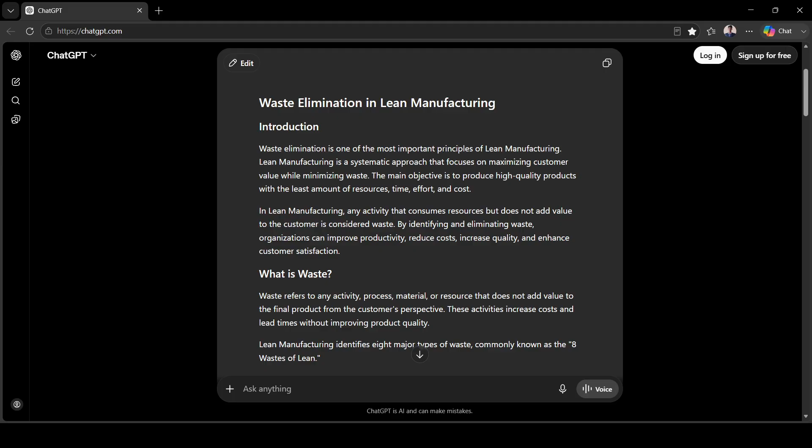Then what is waste? Waste refers to any activity, process, materials, or resources that does not add value to the final product from the customer perspective. This activity increases cost and lead times without improving product quality.

In lean manufacturing, there are 8 major types of waste, commonly known as the 8 wastes of lean. I think before you heard about 7 wastes, and now 8. The 7 wastes are transportation, inventory, motion, waiting, overproduction, overprocessing, and defects. And now the 8th one added is unused skill.

Let's start with the first one: transportation. Transportation waste occurs when material, product, or information is moved unnecessarily from one location to another. Example: excessive movement of raw materials between departments, unnecessary transportation of product within the factory. Effects: increased handling cost, higher risk of product damage, longer production time.

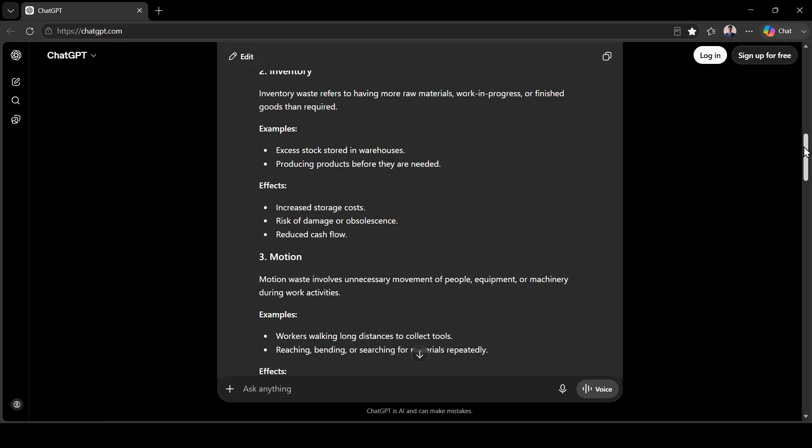The second one is inventory waste. Inventory waste refers to having more raw materials, work in progress, or finished goods than required. Example: excess stock stored in warehouses, producing products before they are needed. Effects: increased storage cost, risk of damage or obsolescence, reduced cash flow.

The third one is motion. Motion waste involves unnecessary movement of people, equipment, or machinery during work activities. Example: workers walking long distances to collect tools, reaching, bending, or searching for materials repeatedly. Effects: worker fatigue, reduced productivity, increased risk of injury.

The fourth one is waiting. Waiting waste occurs when workers, machines, or materials are idle due to delays in the production process. Example: waiting for materials to arrive, machine downtime due to maintenance issues, delay in approval or inspection. Effects: increased lead time, lower productivity, missed delivery schedules.

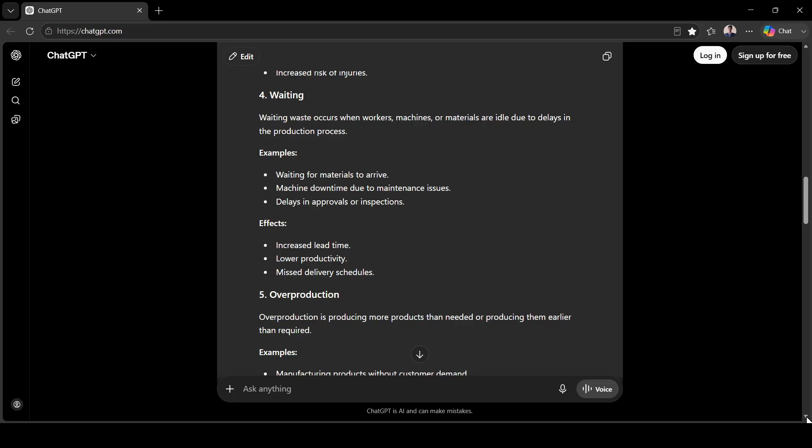The fifth one is overproduction. Overproduction is producing more product than needed or producing it earlier than required. Example: manufacturing products without customer demand, producing large batches unnecessarily. Effects: excess inventory, high storage cost, increased risk of obsolete products.

The sixth one is over-processing. Over-processing occurs when more work is performed on a product than what the customer requires. Example: unnecessary inspection, using expensive processes where a simpler method would be sufficient. Effects: increased production cost, longer processing time, wasted resources.

The seventh one is defects. Defect waste includes errors, repairs, and scrap resulting from poor quality. Example: manufacturing defective products, reworking products due to quality issues. Effects: increased cost, customer dissatisfaction, loss of reputation.

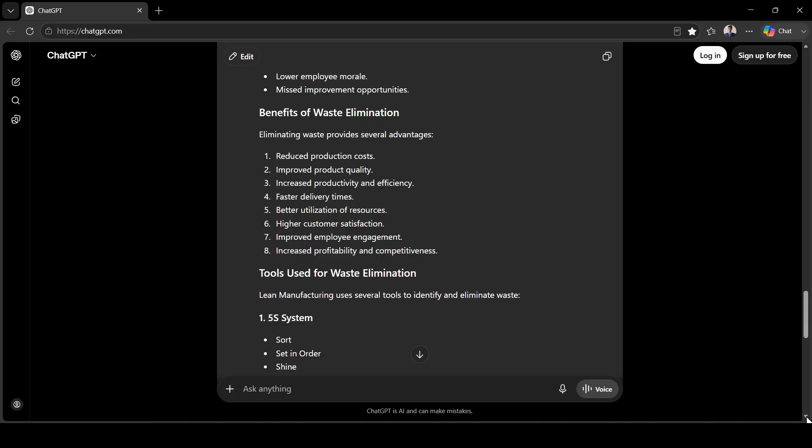Tools used for waste elimination. Lean manufacturing uses several tools to identify and eliminate waste. The first one is the 5S system: sort, set in order, shine, standardize, sustain. This method helps to maintain an organized and efficient workplace. The second one is Kaizen, continuous improvement.

Kaizen encourages employees to continuously identify and implement small improvements. Then value stream mapping, VSM, helps visualize the entire production process and identify non-value activities.

Then JIT, just in time. JIT ensures materials and products are produced only when needed, reducing inventory waste.

The fifth one is Kanban. Kanban uses a visual signal to control production flow and prevent overproduction.

Root cause analysis: tools such as the 5 Whys and fishbone diagram help identify root causes of problems and prevent recurrence. Then conclusion.

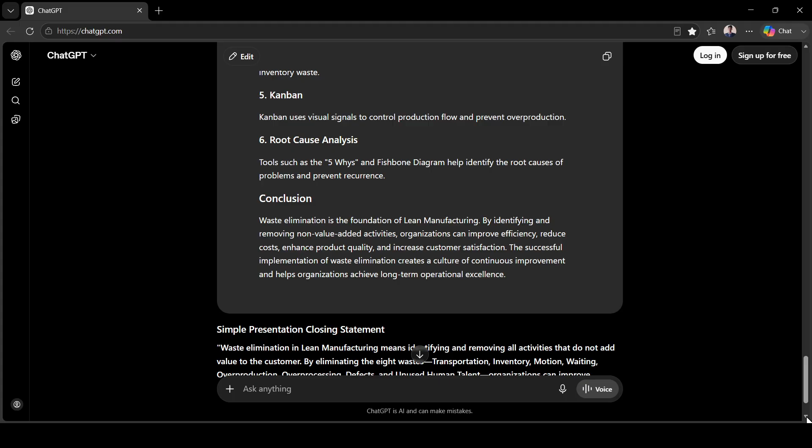Waste elimination is the foundation of lean manufacturing. By identifying and removing non-value-added activities, organizations can improve efficiency, reduce cost, enhance product quality, and increase customer satisfaction. Successful implementation of waste elimination creates a culture of continuous improvement and helps organizations achieve long-term operational excellence.

So, a simple presentation closing statement. Waste elimination in lean manufacturing means identifying and removing all activity that does not add value to the customer, by eliminating waste in transportation, inventory, motion, waiting, overproduction, overprocessing, defects, and unused human talent. Organizations can improve productivity, reduce cost, enhance quality, and achieve continuous improvement.

This is my first part of this waste elimination topic. In the second part, I will explain each one in detail. Let's start with part two.

This is my part 2 video: elimination of waste. There are different types of waste in lean manufacturing and how to eliminate it. That is the most important thing in the current situation.

So, content of an operation: value added work. The part of the job the customer wants to pay for, that is value added work.

Non-value added or hidden waste: work that does not add value, but it is necessary under the current operating condition. That is non-value added or hidden waste.

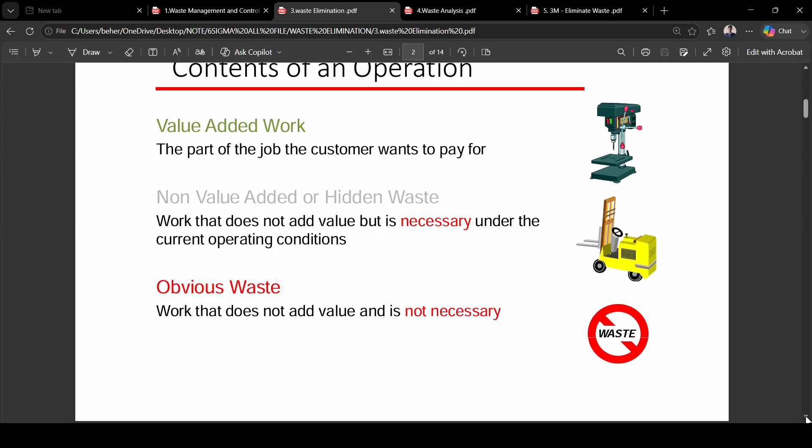Obvious waste: work that does not add value and it is not necessary.

Then, what is value added work? Work that increases the value of the part - that which changes the fit, form, or function. That is value added work.

Then, what is hidden waste? Work that does not add value but it is necessary under the current operating condition: tool changeover, inspection, part handling, unavoidable transportation of parts, unwrapping of purchased parts.

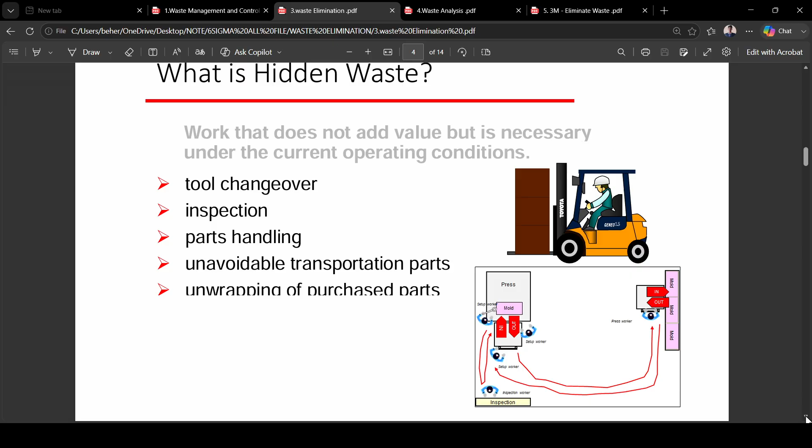Minimize the waste. So it is required, but you can try to minimize this waste. Then, what is obvious waste?

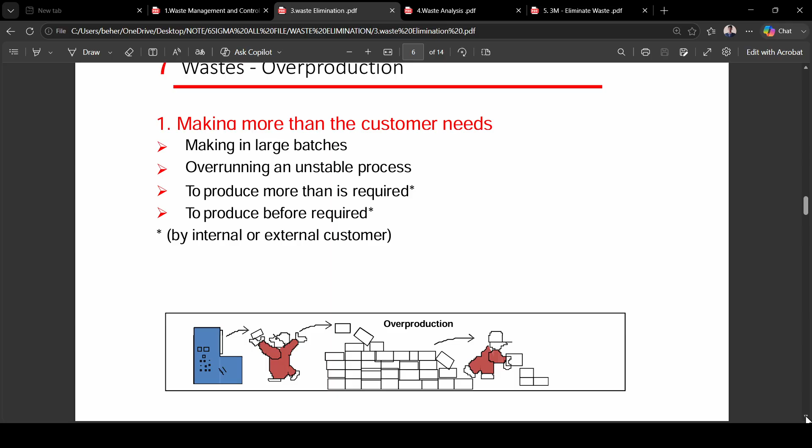Then, seven wastes. First one is overproduction: making more than the customer needs, making in large batches, overrunning an unstable process to produce more than required, or producing before required by external or internal customers.

My second waste is waiting: man or machine waiting - waiting for material, waiting for maintenance, waiting for tool change, waiting for quality checks, non-value added work in cycle, operator inactivity during cycle, machine inactivity during cycle.

Then transportation - materials or parts movement - the third waste. Unnecessary moving or handling of parts, handling equipment, moving with no parts, raw material batch sizes not matching production batch sizes, material stored a long way from point of use.

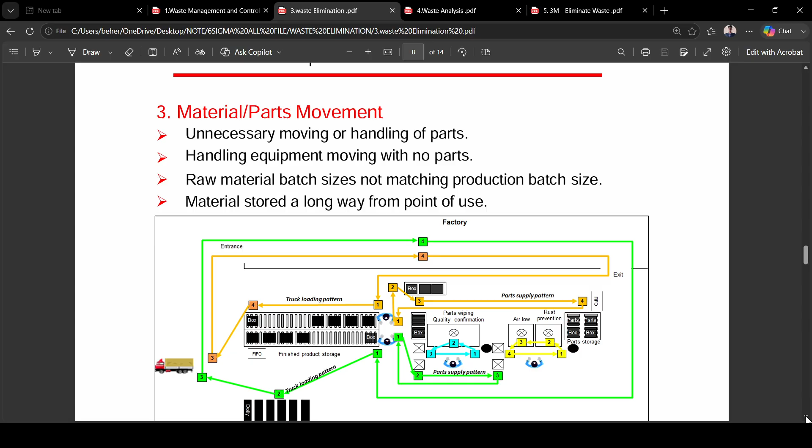Then another wastage is process: inefficient process, wrong choice of equipment, bad definition of customer needs, useless operations, excessive movement in process cycle, too frequent inspection, excessive setup or downtime, slow complicated processes, useless refinement, bottlenecks, unbalanced process.

Then another waste is inventory: large stockpile of finished goods, high WIP, high raw materials, excessive racking or warehouse space, excessive handling equipment, and just in time versus just in case.

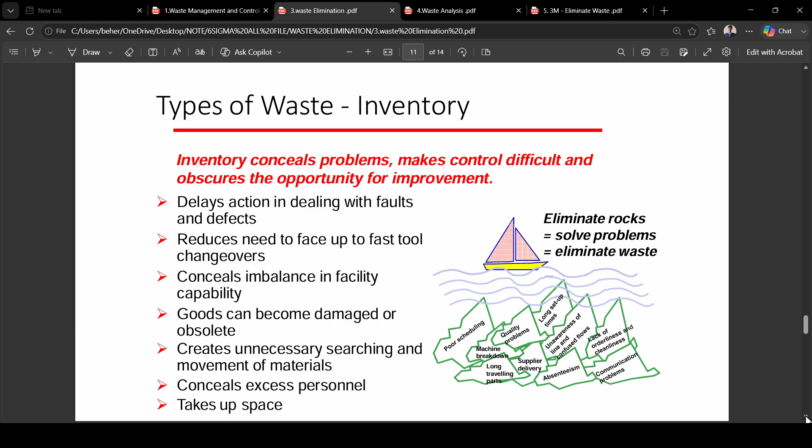Inventory conceals problems, makes control difficult and obscures the opportunity for improvement. It delays action in dealing with faults and defects, reduces the need to face up to fast tool changeover, conceals imbalance in facility capability. Goods can become damaged or obsolete, create unnecessary searching and movement of materials, conceal excess personnel, and take up space.

Then one more waste is operator movement: useless motion, looking for tools or material, double handling, turning, bending, stretching, walking, etc.

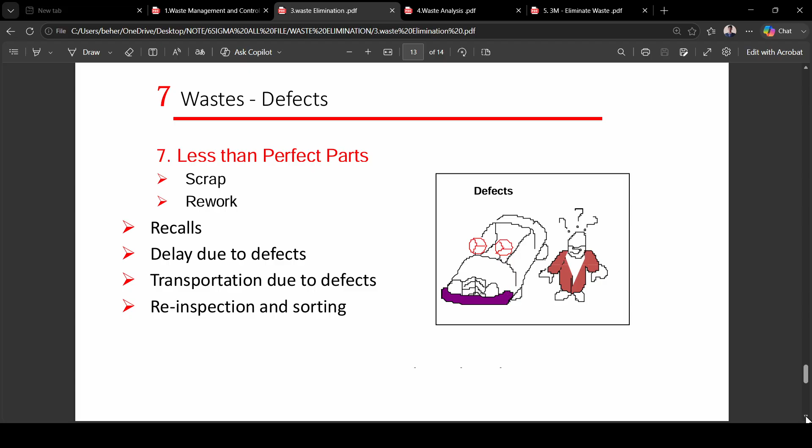One more wastage defect: less than perfect parts, scrap, rework, recall, delay due to defects, transportation due to defects, reinspection, and sorting.

What is obvious waste? These are the obvious wastes where it does not add value and is not necessary for lean manufacturing - overproduction, waiting, transportation, process - these types of waste should be eliminated as soon as possible.

That's my part 2 video, and that's all about the elimination of waste. In part 3, I will explain Muda and the different types of waste like Muda, Muri and Mura. So let's start part 3.

See that image, then you can understand clearly. Let's start about Muda, Muri and Mura.

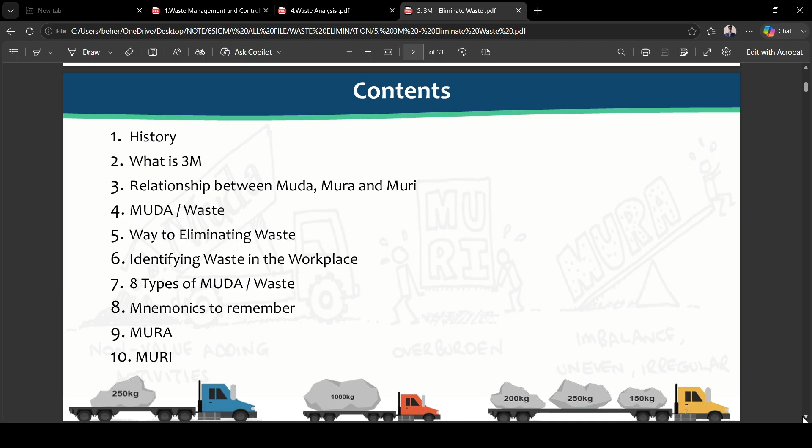There are so many wastes to enumerate. In the content you can see history, what is 3M, the relationship between Muda, Mura and Muri, what is Muda or waste, ways of eliminating waste, identifying waste in the workplace, the 8 types of Muda or waste, and memory tips to remember Mura and Muri. So let's start.

History: 3M is considered a key concept in the Toyota Production System (TPS). The 7 wastes are categorized as unproductive manufacturing practices identified by Taiichi Ohno, the father of the Toyota Production System.

The terms Muda, Mura and Muri - waste, unevenness and overburden - were not actually invented by Toyota; they were used in Japanese martial arts long before Toyota. In martial arts, excess movement in a fight is a waste, since it tires the athlete and leaves them open for an attack.

Similarly, an uneven and unnatural stance will delay your action. Finally, trying to do too much at the same time and using a technique that we have not yet mastered is overburden.

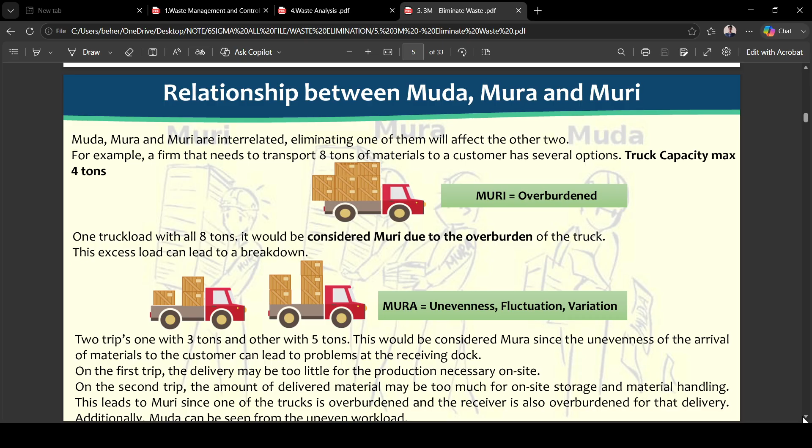Relationship between Muda, Mura and Muri: they are interrelated. Eliminating one of them will affect the other two. For example, a firm that

needs to transport 8 tons of material to a customer has several options. Truck capacity is maximum 4 tons. If one truck carries 8 tons, it would be considered Muri due to the overburden of the truck. This excess load can lead to a breakdown.

Then Mura, unevenness or fluctuation or variation - two trips, one with 3 tons, the other with 5 tons. This would be considered Mura, since the unevenness of the arrival of material to the customer can lead to problems in receiving it.

On the first trip, the delivery may be too little for the production necessary on site. On the second trip, the amount of delivery material may be too much for on-site storage and material handling. This leads to Muri, since one of the trucks is overburdened and the receiver is also overburdened by that delivery. Additionally, Muda can be seen from uneven workload.

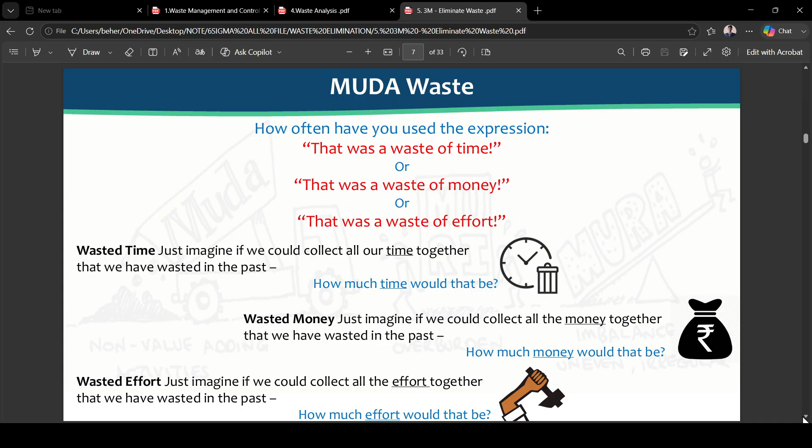See that image, then you can understand waste of time, waste of money, waste of effort.

Now, ways to eliminate waste. Step one is to first identify what is and is not waste. Step two, then we can look at ways of eliminating, or at least reducing, waste.

Identifying waste in the workplace.

Operational activity: value-added activity or process where the customer is ready to pay money. Any process that changes the nature, shape, or characteristics of the product in line with customer requirement. Examples: pressing, welding, heat treatment, cutting, drilling, bending, painting, polishing, etc. This is where you can make a profit.

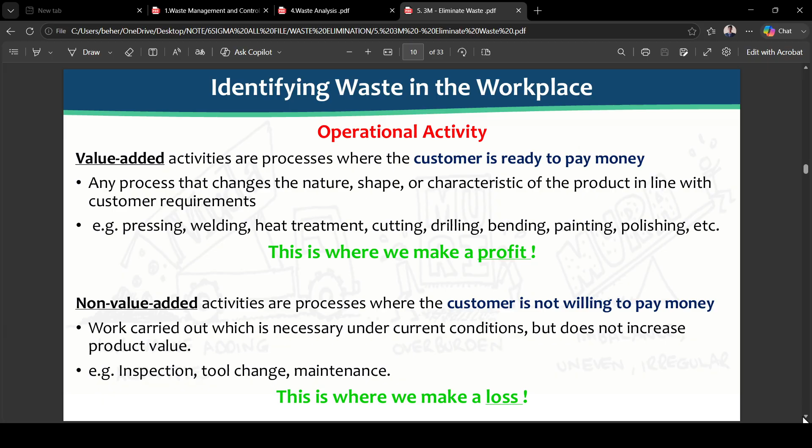Non-value-added activity are processes where the customer is not willing to pay money, work carried out which is necessary under current condition but does not increase product value. Examples: inspection, tool changes, maintenance. This is where you make losses.

Then, eight types of Muda or waste. There are two types of Muda: type 1 and type 2. Type 1 includes non-value-added activity in the process

that are necessary for the end customer. For example, inspection, safety testing. The safety testing does not directly add value to the final product, however, they are necessary activity to ensure a safe product for the customer. Non-value added but essential.

In addition to these two categories, value added and non-value added, there is a third category of activities, and that is non-value added but essential. They are also called necessary non-value adding activity, business value adding activity.

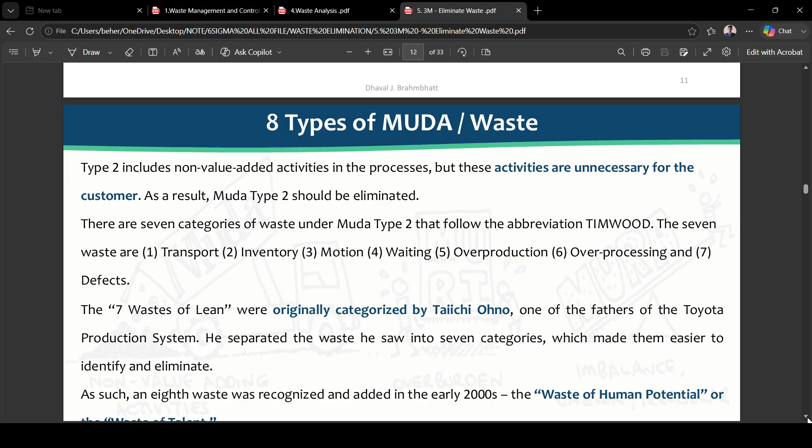Then type 2 includes non-value added activity in the process, but these activities are unnecessary for the customer. As a result, Muda type 2 should be eliminated.

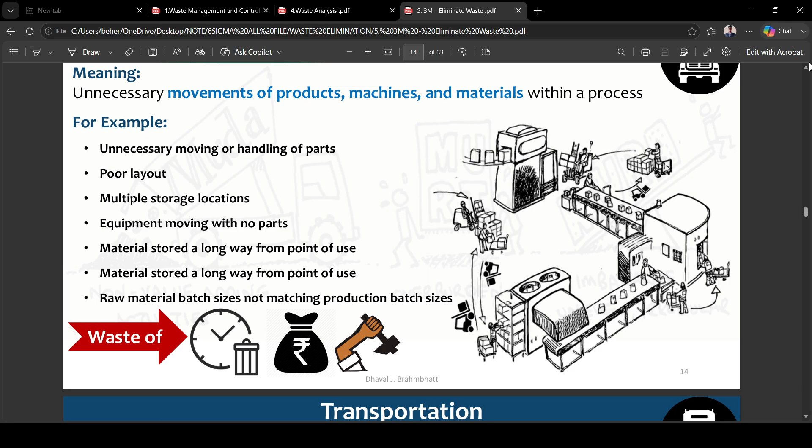Transportation: the meaning of transport is unnecessary movement of product, machine, and materials within a process. For example, unnecessary moving or handling of parts, poor layout, multiple storage locations, equipment movement with no parts, material stored a long way from point of use, raw material batch size not matching production batch size. That is transportation waste.

Causes of transportation: isolated places, large lot production, poor process planning with unnecessary steps, single skilled worker sitting to perform operation, need for a transportation system is assumed.

How to eliminate transportation? Use a manufacturing cell, flow production, multi-skilled worker, milk run concept, standing to perform operation, higher utilization rate, water spiders, Kanban or pull production.

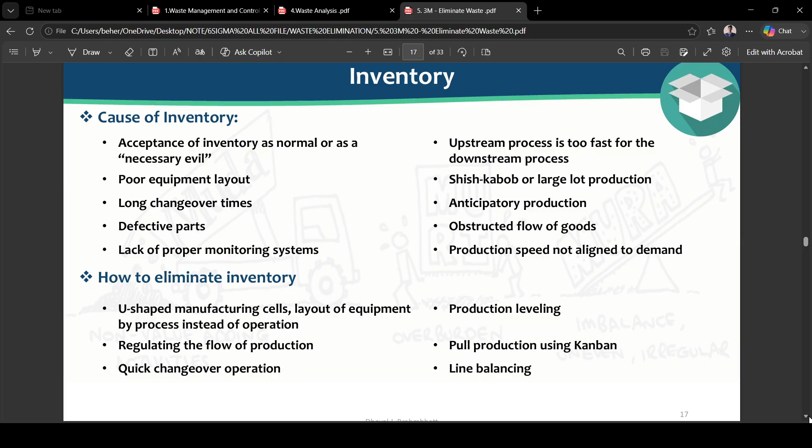How to eliminate inventory? U-shaped manufacturing cell layout, laying out the equipment by process instead of operation, regulating the flow of production, quick changeover operation, production leveling, pull production using Kanban, line balancing.

Motion: unnecessary or repetitive movement of people within a process. For example, looking for tools or material, double handling, turning, bending, stretching, and walking. This is the waste of time, effort, and money.

Causes of motion: isolated operation, low employee morale, instability in operations, sharing of machine and tools, processes not aligned resulting in motion overhead, poor work layout, undeveloped skills, increase in staff or work hours, work standards not in place.

How to eliminate motion? Gradually switch to flow production, create U-shaped cell layout of equipment, increase operator awareness about motion during an operation, increase training, make standardization through separate tools at each workstation.

Another one is waiting. People have to wait to start the next step in the process, waiting times for materials or information flow that cause delay.

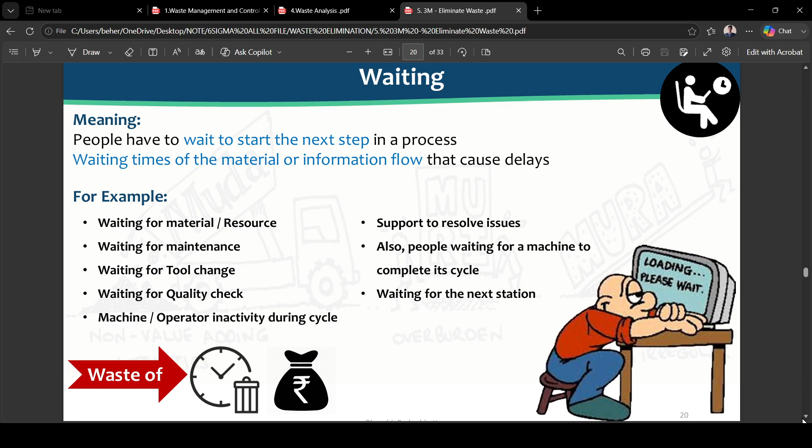For example, waiting for a material or resource, waiting for maintenance, waiting for tool changes, waiting for quality check, machine or operator inactive during cycle, support to resolve issue. Also, people waiting for a machine to complete its cycle, waiting for next station.

Causes of waiting: unplanned machine downtimes, long setup and machine changeover times, inadequate staffing, lack of communication tools, time required for rework, poor work layout, absence for work, poor planning and process documentation, less resources.

How to eliminate waiting? Standardization workflow, create U-shaped cell layout of equipment, make resources available, standardizing instruction, training and process, developing multi-skilled human resources.

Then another one is overproduction. Overproduction means more production than needed or before it is needed.

Causes of overproduction: large lot production, anticipatory production, overrunning and unstable process, overstaffing or too much equipment, machine that turns out bad product too quickly, poor planning of production.

Causes of overproduction: poor production planning, long setup and machine changeover times, lack of communication, excess raw materials.

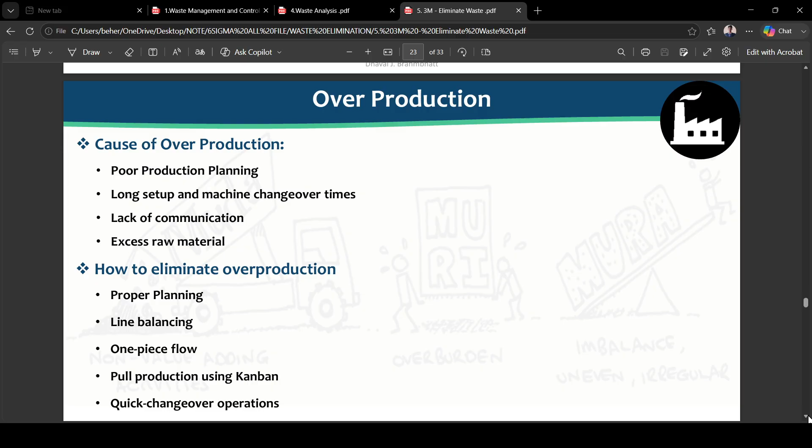How to eliminate overproduction? Proper planning, line balancing, one piece flow, pull production using Kanban, quick changeover operation, level production, small lot or mixed production.

Then another one is over-processing: doing more work or higher quality work than your customer requires. More work or higher quality work than required by the customer.

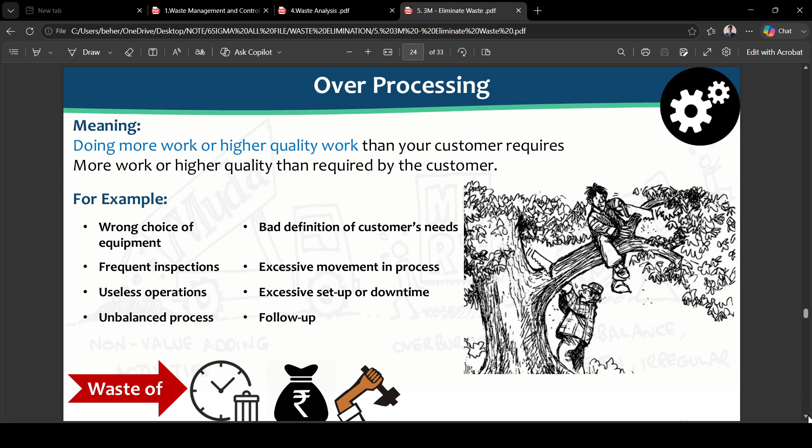For example, wrong choice of equipment, frequent inspection, useless operation, unbalanced process, bad definition of customer need, excessive movement in process, excessive setup or downtime.

Over-processing, causes of over-processing: inadequate study of process, inadequate study of operation, ill-suited jigs, incomplete standardization, materials not studied.

How to eliminate over-processing? More appropriate process design, review of operation, improvement of jigs using automation through standardization, promotion of value analysis and value engineering technique.

Then defects: rework, scrap and incorrect information. The first time, additional effort due to rework, scrap and incorrect data. For example, scrap, rework or reject, recall, delay due to defects, transportation due to defects, re-inspection and sorting.

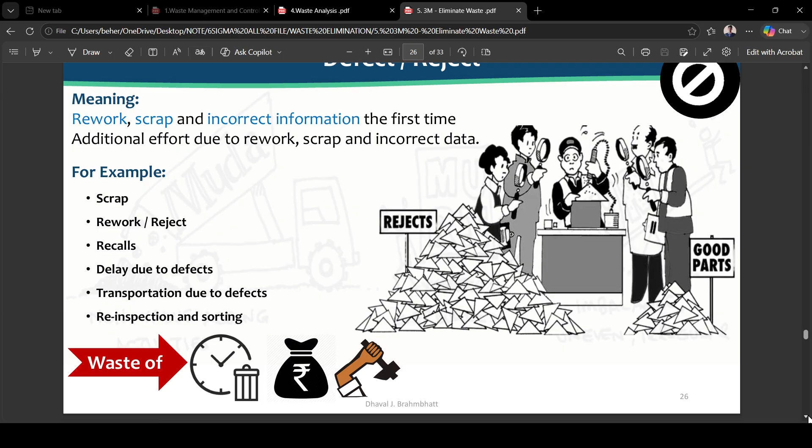That is one more dangerous waste in Indian manufacturing. Defects or rejects, causes of defects or rejects.

Causes of defects are: emphasis on downstream inspection, no standards for inspection work, omission of standard operation, material handling and transportation, operator error, lack of sufficient quality control process, missing repair and documentation standard, undocumented design changes, misunderstood customer requirements, raw material not as per required.

How to eliminate defects? Standard operation, mistake proofing devices, full lot inspection, flow production, building quality in each process, elimination of need to pick up and set down pieces, improvement of jigs using automation, promotion of value analysis and value engineering.

Unused human talent, skills underutilized. Underutilizing or inadequate teammates, talents, skills and knowledge. For example, not tapping into and following up on the ideas and thoughts of the employee. Underutilization of human potential.

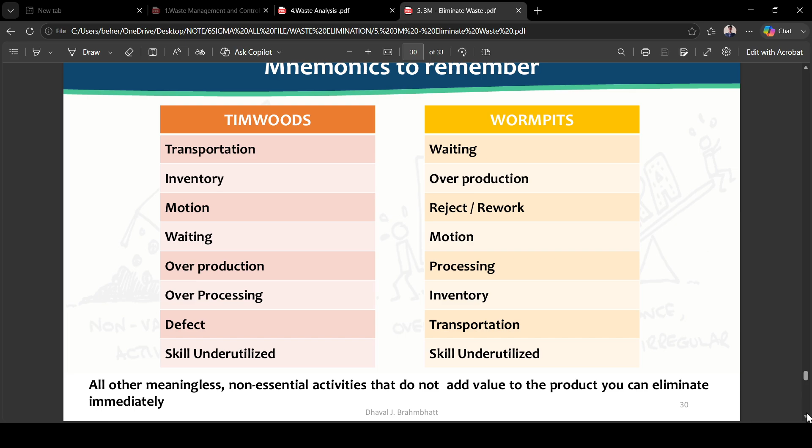Mnemonics to remember: TIMWOODS are the wastes. Another meaningless or non-essential activity that would not add value for the product, you can eliminate immediately.

Mura is any kind of unevenness or non-uniformity or irregularity, mainly used for material flow. It also applies to many other cases outside of material flow: unevenness in the reception of raw material quantity, variation of the order from the customer, unevenness in the scheduling of the work center, unevenness in product output due to variation.

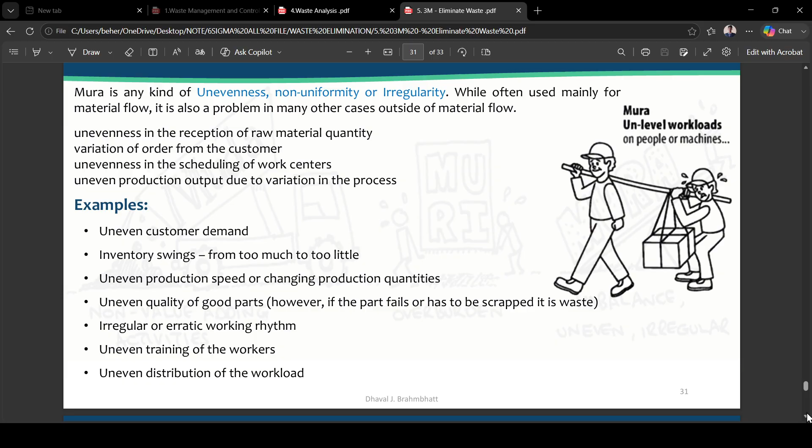Example: uneven customer demand, inventory swing from too much to too little, uneven production speed, changing production quantity, uneven quality of good parts. However, if the part fails, it has to be scrapped as waste. Irregular or erratic working, uneven training of the workers, uneven distribution of the work.

Muri, overburden, beyond one's power. Excessiveness, impulsive, unreasonable, and things that are too difficult. Naturally, the main focus here is on the people.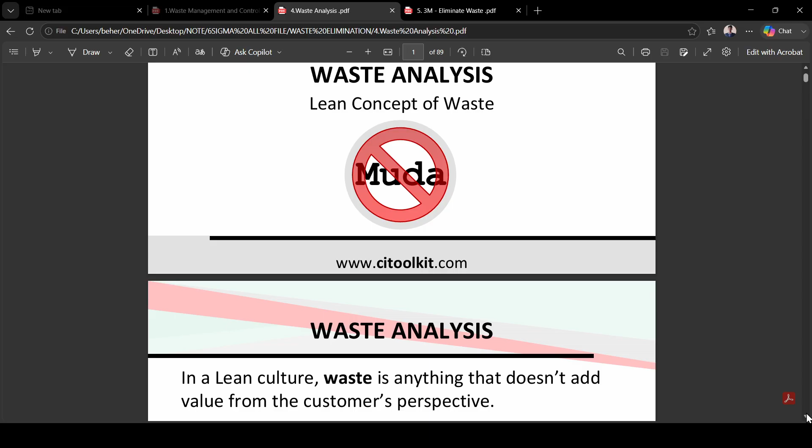Waste analysis, how to do waste analysis like Muda. In a lean culture, waste is anything that does not add value from the customer perspective. It includes activities that consume resources but do not contribute any value to the customer.

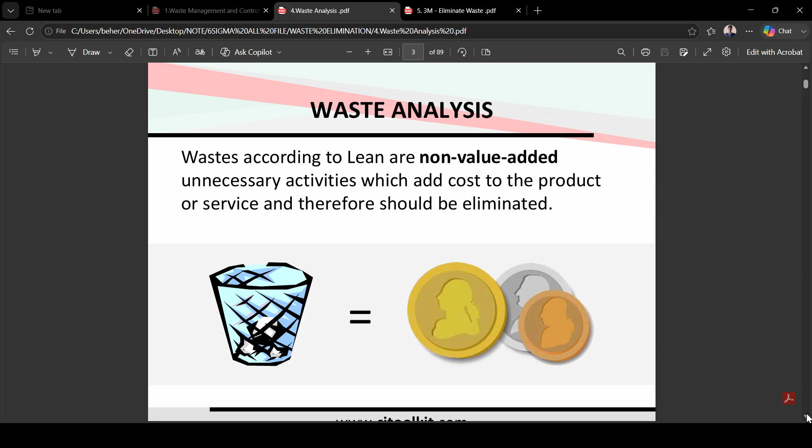Waste according to Lean are non-value added, unnecessary activities which add cost to the product or service, therefore should be eliminated.

So waste analysis is one of the core principles of lean thinking that involves identifying, quantifying, eliminating, and preventing waste. It is one of the easiest ways an organization can improve its operation.

Mainly lean concept and tools focus on continually identifying and eliminating waste. In fact, one of the main objectives of lean is to remove all forms of waste from the value stream. For most companies, it is safe to stay focused on the elimination of waste in the earlier years of the lean journey.

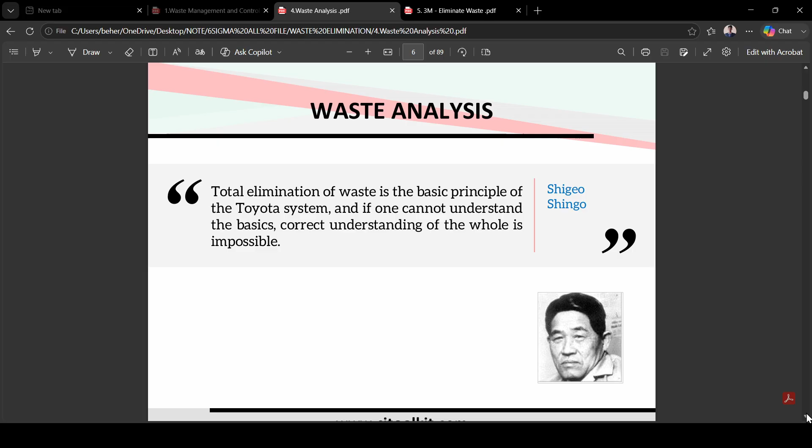So total elimination of waste is the basic principle of the Toyota system. And if one cannot understand the basics, correct understanding of the whole is impossible.

So much of the focus in Lean and Kaizen is on identification and removal of waste, and this waste may exist in the value stream, process or facility.

Benefits of waste analysis: save money and gain a competitive advantage, improve morale and pride in the workplace, reduce lead time and defect rates, improve productivity, flexibility, quality and safety, bring efficiency and effectiveness to the existing processes.

As a result, products and services will better meet customers' expectations.

The nice thing about focusing on waste is that the benefits are immediately visible, which will get people to invest in lean intellectually and emotionally.

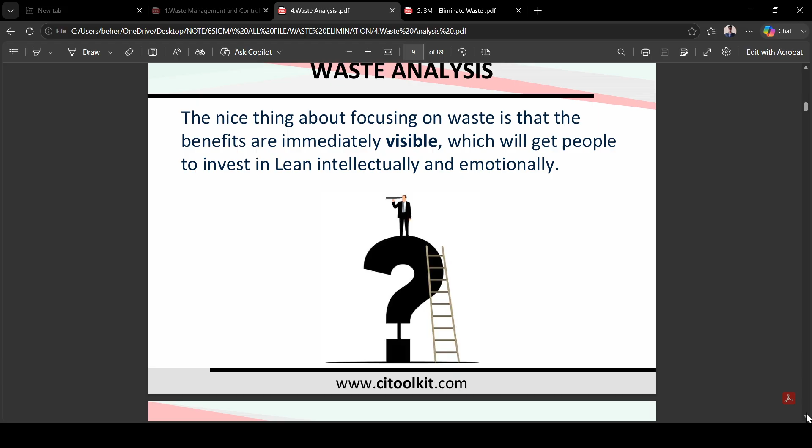Waste analysis is applicable in manufacturing, service, and office environments. Waste takes many forms and can be found at any time and in any place. There are many classifications of waste.

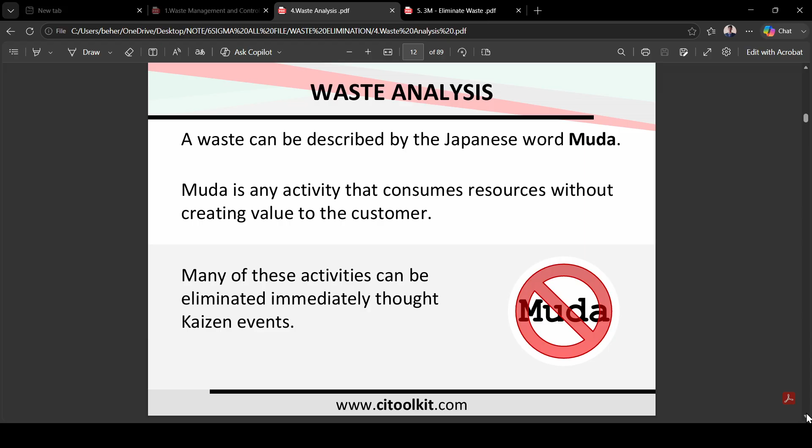Waste can be described by the Japanese word Muda. Muda is any activity that consumes resources without creating value to the customer. Many of these activities can be eliminated immediately through the Kaizen event.

The three M's question: Muda - consuming resources without creating value to the customer. Examples include mistakes that require correction.

Mura - unevenness, fluctuation and variation in the operation. Examples include asking someone to do three tasks and another to do ten tasks.

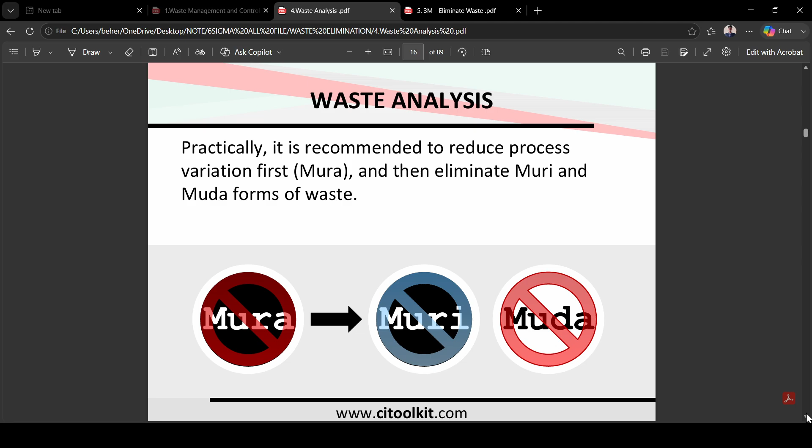Practically, it is recommended to reduce process variation first, Mura, and then eliminate Muri and Muda forms of waste.

So one of the most basic and widely used models across many industries around the world is the 8 wastes. Categorizing waste into these eight forms makes them easier to identify and helps identify priorities for action.

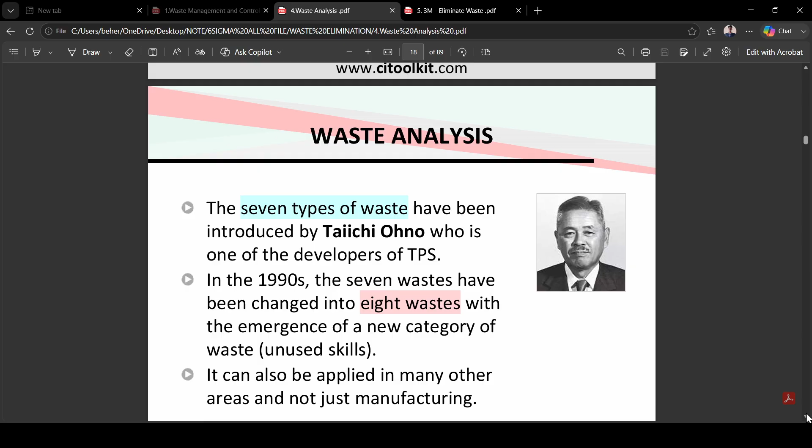The seven wastes were introduced by Taiichi Ohno who is one of the developers of the Toyota production system. In the 1990s, the seven wastes were changed to eight wastes with the emergence of a category for waste, unused skills. It can also be applied in many other areas, not just manufacturing.

The most important objective of the Toyota production system has been to increase production efficiency by consistently and thoroughly eliminating waste.

Waste analysis, the eight wastes: unnecessary transportation - the unnecessary movement of items or information from one place to another place. Waiting - occurs anytime a person or product is waiting. Overproduction - creating too much material or information.

Defects or errors/mistakes, causing the effort to be redone to correct the problems.

Unnecessary movement performed by people that is not required. Excess inventory - having more materials or information than what is actually needed. Overprocessing - processing more than necessary to produce desired output. Unused talent - wasting human talent, creativity and enthusiasm.

An easy way to remember these 8 types of waste is with the following acronym: TIMWOODS.

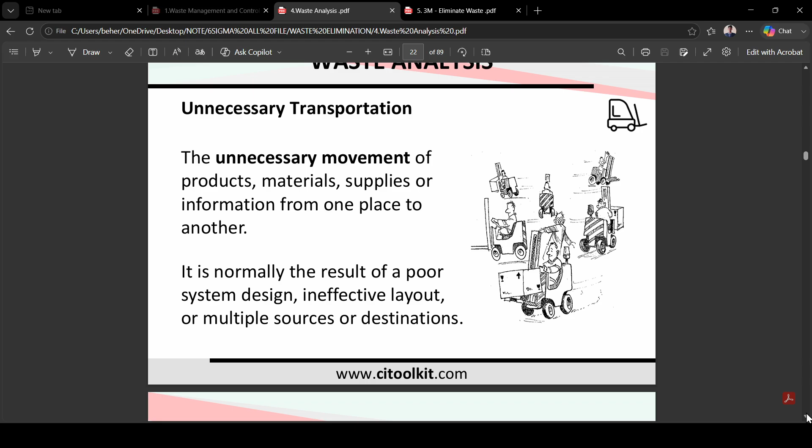Unnecessary transportation - the unnecessary movement of product, material, supplies or information from one place to another place. It is normally the result of poor system design, ineffective layout, or multiple sources or destinations.

Unnecessary transportation - moving things costs money, causes production and delivery delay, and may include the risk of loss or damage. It is clearly visible in batch production lines, where work in process and finished goods are passed from one area to another.

Then unnecessary transportation. While a product is being transported, it is not being worked on, and no value is being added to it. So many companies now require their suppliers to be close in order to eliminate transportation costs.

Unnecessary transportation examples: storing raw material far away from the production line, having a raw material storage area and the loading area at opposite ends, and moving patients from department to department.

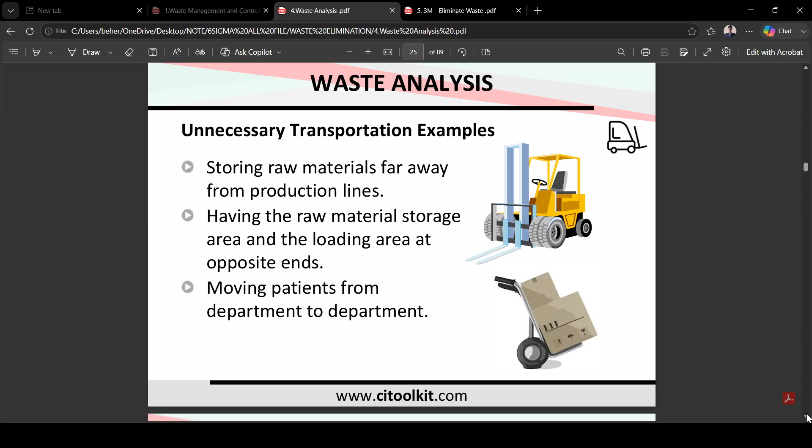An unnecessary transportation example: storing office supplies far away from the office area, moving documents for approval or seeking authorization, and moving information through electronic medical records, or EMR, in a medical center.

Ideas to reduce or eliminate unnecessary transportation: find ways to reduce the distance between work areas, try to transport in bulk and in both directions, relocate items to be closer to where the work is performed, and introduce a standard sequence for transportation.

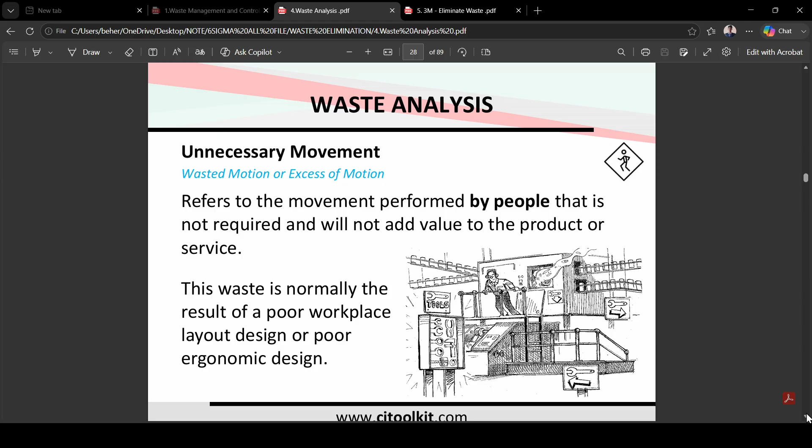The second waste is unnecessary movement. Wasted motion or excess motion refers to movement performed by people that is not required and will not add value to the product or service. This waste is normally the result of poor workplace layout design or poor ergonomic design.

Waste analysis of unnecessary movement: moving material and product from one location to another is transportation waste, while the unnecessary movement of people and tools during the production process is movement waste.

Unnecessary movement not only consumes time and energy, but it may also increase health and safety issues and can affect the reliability of production and operations.

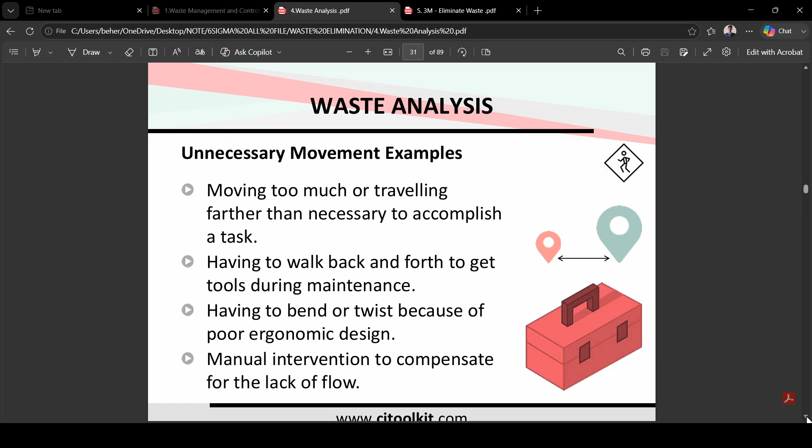Unnecessary movement examples: moving too much or traveling further than necessary to accomplish a task, having to walk back and forth to get tools during maintenance, having to bend or twist because of poor ergonomic design, and manual intervention to compensate for lack of flow.

Unnecessary movement of people examples: carrying paperwork back and forth between two locations far away from each other, placing printers and photocopiers far away from the office, and having many unnecessary points of customer contact in a bank.

Ideas to reduce or eliminate wasted movement: evaluate the flow and layout to identify chances to streamline the process, relocate the required tools at the point of use, improve workplace ergonomics, and implement time and motion principles.

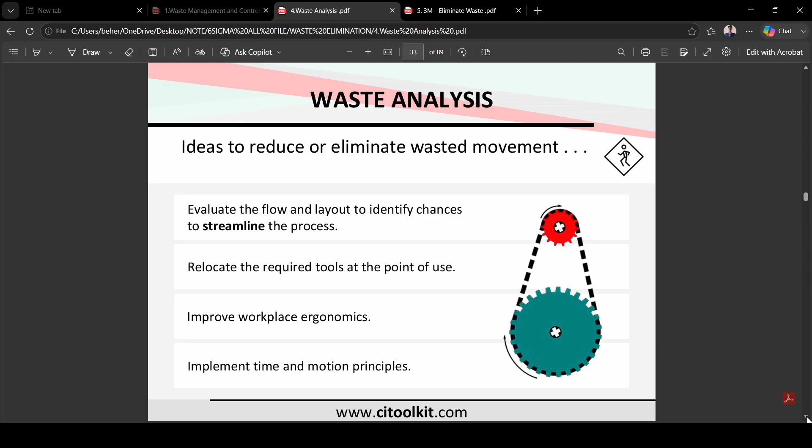One more waste is waiting. This refers to the idle time that occurs when there are unnecessary delays within the process. In the traditional process, a large part of the product's life is spent waiting to be worked on. Waiting occurs when a product is not in transport or being processed, or when a person is waiting for a work or service to be completed.

That costs time and money. Anytime a person or a product is waiting, no value is being added, lead times are increased, and wasted time is transferred to the customer through increased cost.

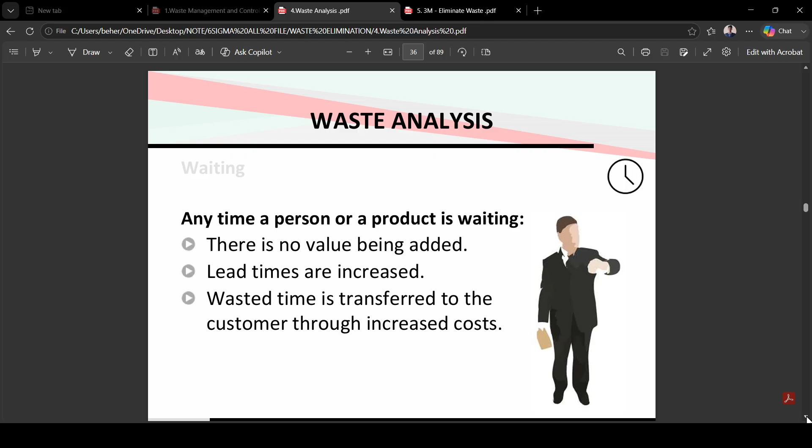Waiting examples: waiting for material, parts, inspection, decision, approval, or people; waiting for the maintenance department to repair a breakdown; waiting for a changeover to be completed; waiting for a slow machine to operate; and waiting for a preceding operator to complete his or her work.

Waiting examples: a customer waiting for service, waiting in line at a grocery store, waiting for a meeting to start, arriving an hour early for a meeting, waiting for a return call when the person said he would call back immediately, and experiencing poor computer performance.

Waiting examples: waiting in the doctor's waiting room, waiting for lab results, and emergency department waiting time.

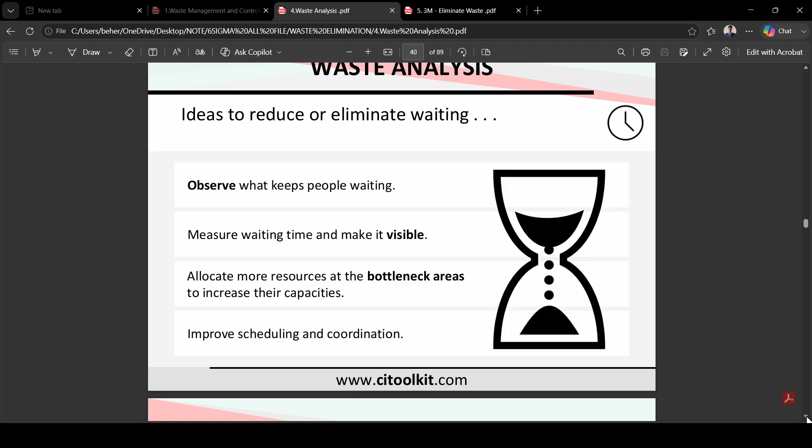Ideas to reduce or eliminate waiting: observe what keeps people waiting, measure waiting time and make it visible, allocate more resources at the bottleneck area to increase their capacities, and improve schedule and coordination.

Waste analysis: excess of inventory. Excess of inventory is having more materials or information than what is actually needed. Some inventory is necessary, but most processes can be managed differently to minimize inventory.

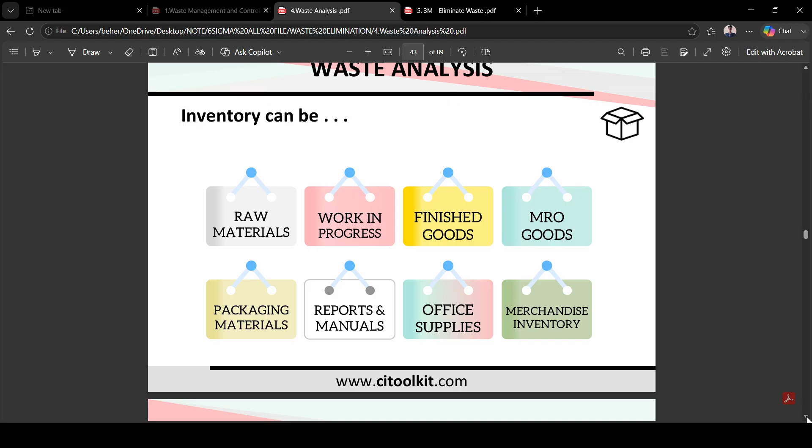Inventory can be raw materials, work in progress, finished goods, packaging materials, reports and manuals, office supplies, or merchandise inventory.

Let's see that image: raw materials, work in progress, finished goods. Inventory is harder to see in an office or transactional environment.

Inventory in the office can be office supplies, physical reports, manuals that are not immediately required. Examples include keeping more materials than needed, storing raw materials ahead of requirement, expired and obsolete inventory, inventory held for inspection, and poor workplace organization in a warehouse or office.

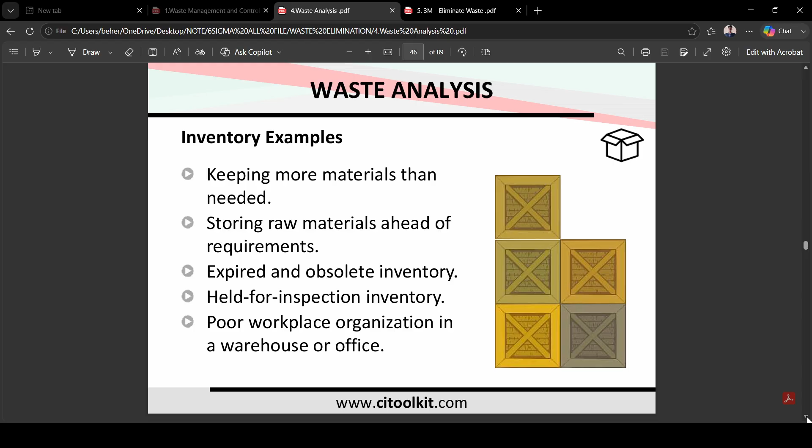Other inventory examples: archiving documents that are not required and will never be used in the future, storing computer programs that will never be used on hard drives, keeping outdated and duplicated files, giving people documentation they will never need, and unneeded and spam emails.

Ideas to reduce or eliminate inventory: keep track of inventory level, reduce unnecessary safety stock, avoid buying in bulk unless you are sure you will use all of it, and apply line balancing and Kanban.

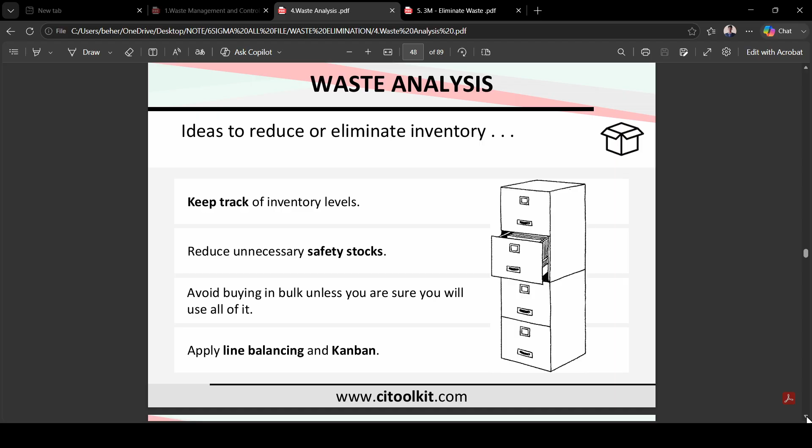Another waste is overproduction: producing greater quantities or making more of something than is required by the customer. Overproduction is thought to be the worst of the eight wastes as it creates other types of waste.

Overproduction occurs when making things before they are required - early production, producing greater quantities than what customer demand calls for. A process produces more than what the next process can use right away.

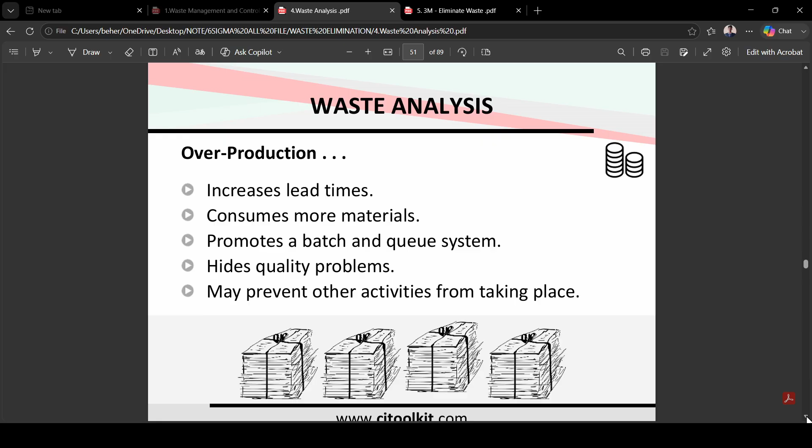Waste analysis: overproduction increases lead times, consumes more materials, promotes a batch and queue system, hides quality problems, and may prevent other activity from taking place.

Overproduction examples: creating parts or information not needed by the downstream process, producing faster than the downstream process or customer demand, pushing rather than pulling parts and information, and producing information that will never be used or sending reports that will never be looked at.

More overproduction examples: printing multiple versions of the same publication hoping to distribute them all, making a meal that the restaurant customer doesn't want, buying vegetables for one month on your weekly shopping trip, and performing work which is not needed and before it is needed.

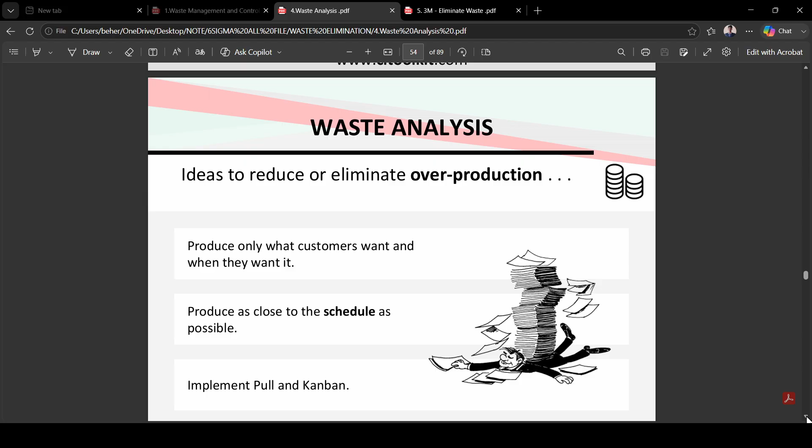Ideas to reduce or eliminate overproduction: produce only what the customer wants and when they want it, produce as close to the schedule as possible, and implement pull and Kanban systems.

Overprocessing: processing beyond what the customer requires and providing more value than what he or she is willing to pay for. It occurs when you work on a process more than necessary.

Overprocessing may result from complex processes, poor product or service design, unclear requirements and tolerances, and internal standards that do not reflect true customer requirements.

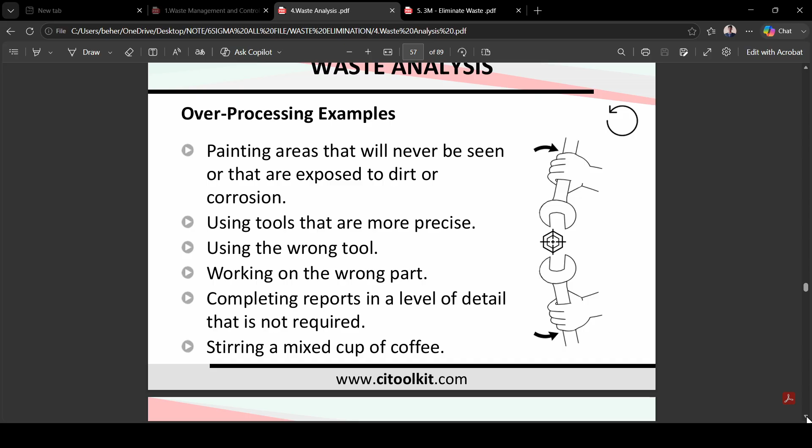Overprocessing examples: painting an area that will never be seen or exposed to dirt or corrosion, using tools that are more precise than needed, using the wrong tool, working on the wrong part, completing a report in a level of detail that is not required, and stirring a mixed cup of coffee.

More overprocessing examples: duplication of work and filling multiple forms with repeated data, reinventing the wheel or repeating work which has already been done, bureaucratic approval systems that require multiple reviews and signatures, and unnecessary tests, diagnostics and therapies for a patient.

Ideas to reduce or eliminate overprocessing: find ways to do less or use less, with every task try to touch it only once, with every document try to touch it only once, and provide clear standards for every process.

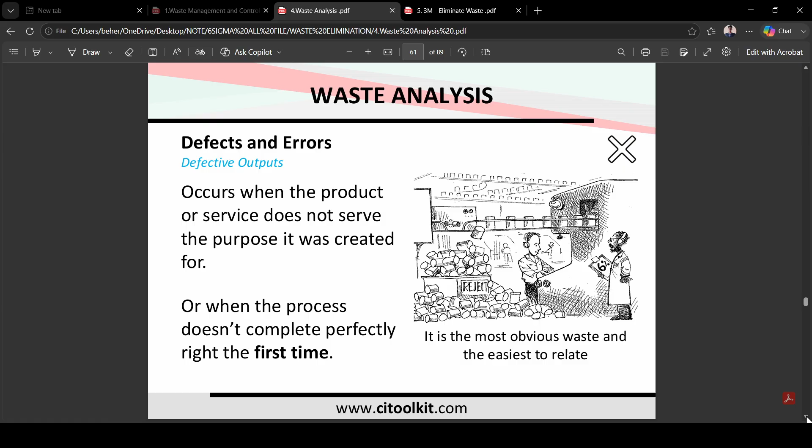Another waste is defects and errors. Defective output occurs when the product or service does not serve the purpose it was created for - when the process does not complete perfectly right the first time. It is the most obvious waste and the easiest to relate to.

Whenever a defect occurs during a production process, extra costs are incurred as a result of scrapping or reworking defective products. And if it is passed on to the customer, additional costs are incurred as a result of customer returns and negative reputation.

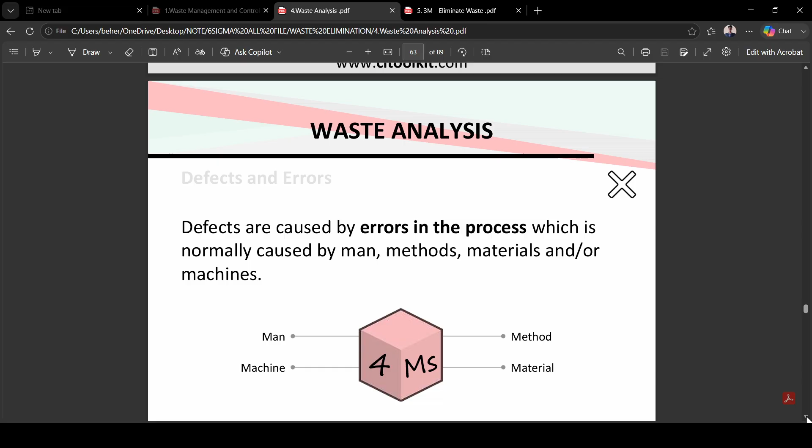Defects are caused by errors in the process, which is normally caused by man, method, materials, and machine.

Defects and error examples: a manufacturing fault part that requires rework or needs to be scrapped, a product held for inspection, producing the wrong part or product, delivering a product to the wrong destination, and not on time in full delivery.

More examples: any rework activity including repair, recheck, return, reorder, replace; misdiagnosis in the healthcare industry; duplicate medical record numbers; and dealing with guest complaints in a hotel.

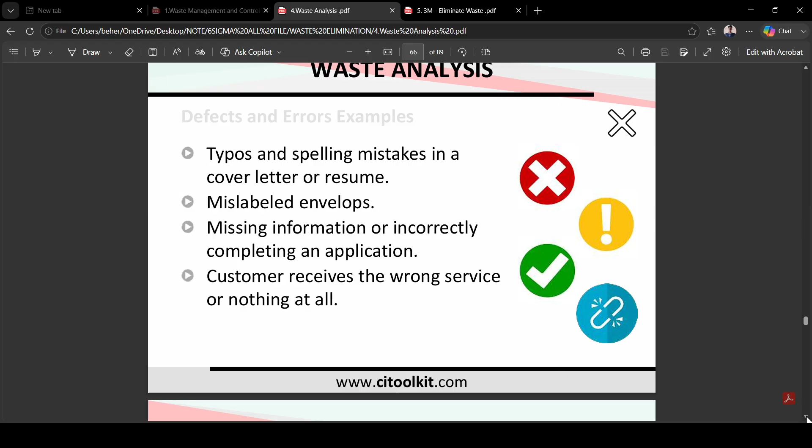Further examples of defects and errors: typos and spelling mistakes in a cover letter or resume, mislabeled envelopes, missing information or incorrectly completing an application, and customers receiving the wrong service or nothing at all.

Ideas to reduce or eliminate defects or errors: find where the errors occur by collecting data, analyze root causes, solve the problems as early as possible, and avoid multitasking and mind wandering.

Another waste is unused human skill. This waste can be described in several ways: unused creativity, wasted ideas and talent, untapped human potential. Not using the potential and creativity of employees, and not involving them, is a waste.

Unused human skill. Organizations employ people for specific skills they possess, and it is wasteful not to take advantage of their other skills and capabilities. Engage people and exploit their skills to solve everyday problems.

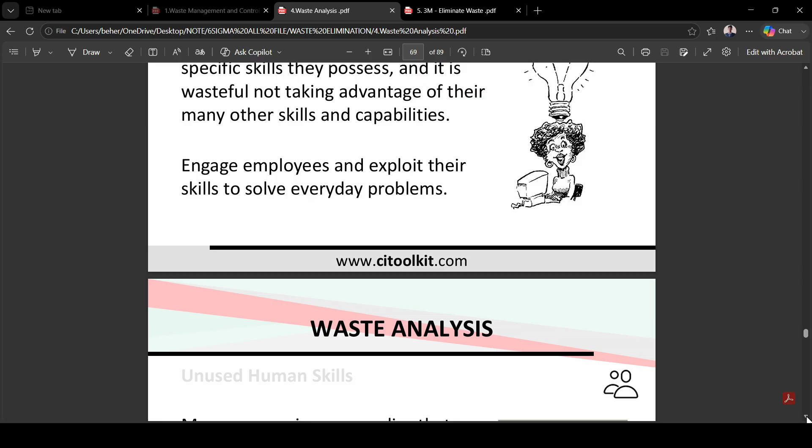Many companies now realize that their biggest asset is their employees. It is only by exploiting the ideas and skills of employees that companies can reduce other types of waste and improve their performance.

Examples of unused human skill: when employees are not effectively engaged in the process, when the right person is not available at the right place, when the person performing the work is overqualified.

Ideas to reduce and eliminate unused human skill: make the most of brainstorming and other idea gathering techniques. Implement an idea system and encourage employees to make improvement suggestions. Ensure that ideas and suggestions are well heard. Show respect and confidence for all by letting them solve their daily problems as owners.

All forms of waste can be present in the service environment and office, as well as the production area. Examples: re-entering data, duplication, manual checking, data error, typos and misspellings.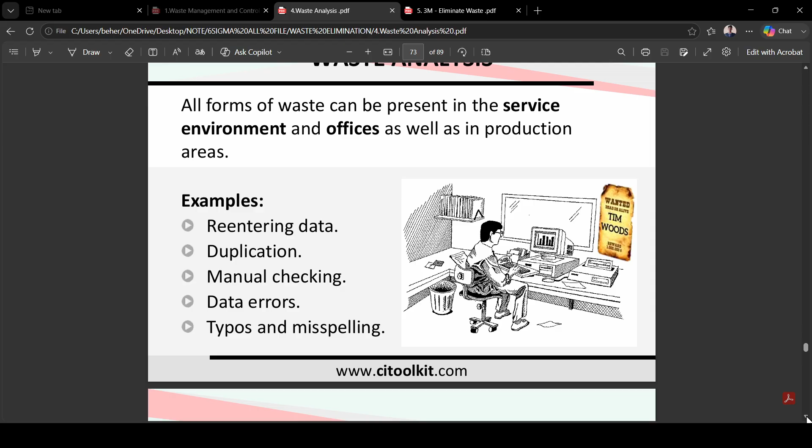There are other forms of waste beyond the eight wastes. Wasted space, as the customer will not pay for capital waste, throwing money at problems instead of addressing the real root cause. Wasted energy, a hidden share cost, pollution.

The producer is increasingly being made to pay for it. Unclear communication, roles, responsibilities, authority, and a lack of training, motivation, and empowerment. Excessive resources, as they only increase cost and add no value.

Capital waste or wasted money examples: renting a warehouse to store extra inventory, hiring an inventory control clerk or an operator to repair damaged inventory, buying a forklift for each forklift driver.

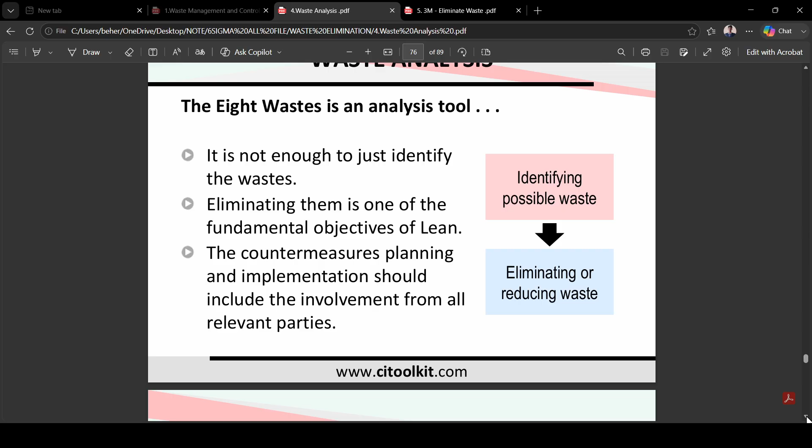The eight wastes as an analysis tool. It is not enough to just identify the waste; eliminating them is one of the fundamental objectives of lean. The countermeasure planning and implementation should include the relevant parties.

Tools and techniques to identify and eliminate waste. Lean provides the required methodology, tools and techniques: waste walks and Gemba walks, opportunity process maps, waste recording forms and waste logs, regular improvement meetings, 5S and visual management, value matrix, value stream mapping, targeted Kaizen events, team-based problem solving.

A waste walk enables you to understand how the process works and helps to quickly identify waste and continuous improvement opportunities. The waste walk.

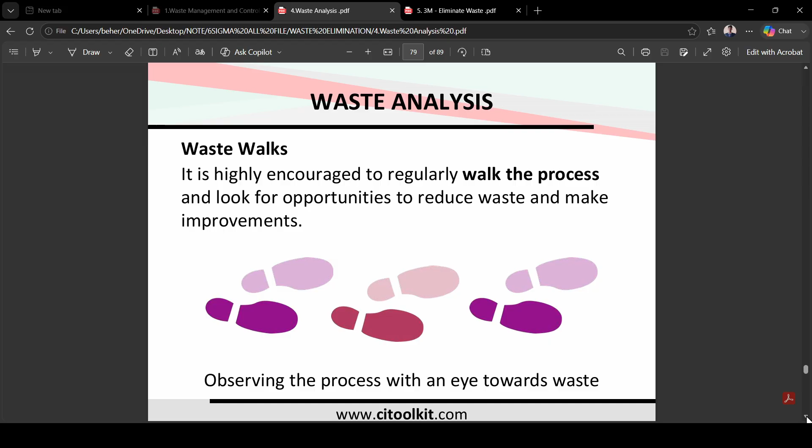It is highly encouraged to regularly walk the process and look for opportunities to reduce waste and make improvements. Observe the process with an eye towards waste.

How to conduct a waste walk: clearly describe the objective of conducting the waste walk. Select the process and area, define the boundaries, prepare an observation prompt to collect the desired information. Get permission from the process owner or supervisor to conduct the walk and talk to the people there.

How to conduct a waste walk: walk the flow of the process and look for each of the eight types of waste. Collect data and observe actual practices. Interview people and ask questions. Identify opportunities to eliminate waste. Prioritize improvement actions as appropriate.

Waste recording forms and waste logs help identify and record wasteful activities. They usually contain a place to classify the waste according to the eight wastes, and may also contain a place encouraging the team to propose and prioritize action.

Remember the eight kinds of waste are present in the workplace and offices. Waste creates no value and costs a lot of money.

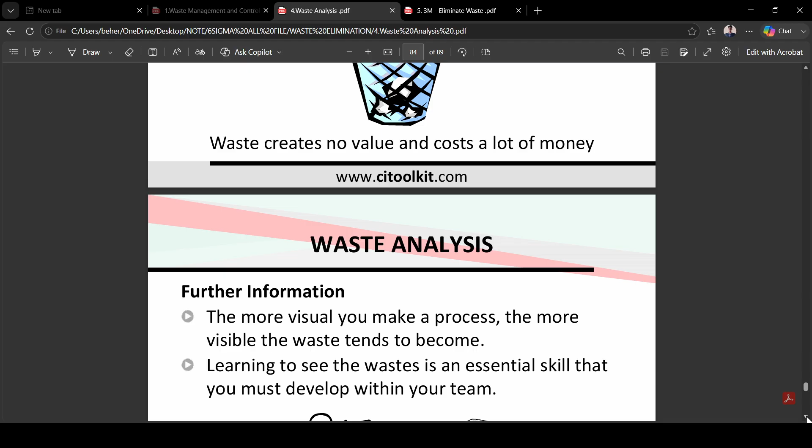Further information: the more visual you make a process, the more visible the waste tends to become. Learning to see the waste is an essential skill that you must develop within your team.

Further information: another method is using the 5QMS model, which is useful to understand the root causes: man, machine, material, method, management, quality and safety.

Further information: it is good to think in terms of the eight wastes or 5QMS. However, does it really matter which category you assign it to?

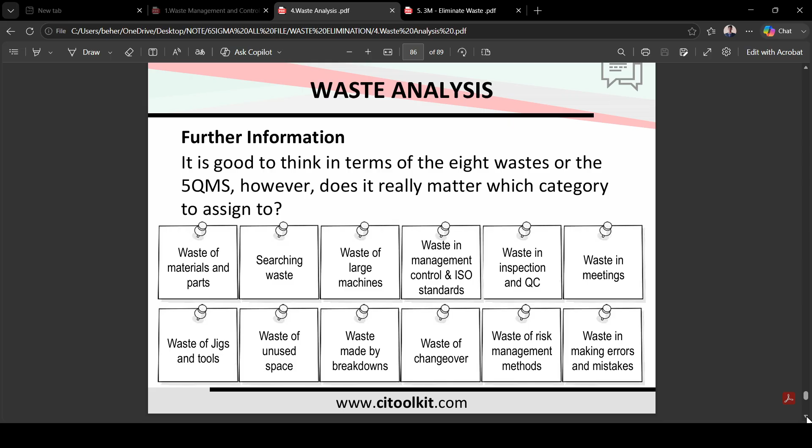Waste of materials and parts, searching waste, waste of large machines, waste in management, control and ISO standards, waste in inspection and quality control, waste in meetings, waste of jigs and tools, waste of unused spaces, waste made by breakdown, waste of changeover, waste of risk management method, waste in making errors and mistakes.

Do you have any of the below issues in your area? Time wasted looking for things, poor safety record, escalating operating cost, material shortages, incomplete or incorrect information, underutilized employees, inconsistent employee performance, unreliable supplier performance, high employee turnover, unclear performance measures, late or missed deliveries, quality being treated as the responsibility of quality personnel only, and dissatisfied customers.

Then common causes of the waste: misunderstanding of customer true needs, variability in the process or machinery, pressure to maximize production to justify expensive equipment or technology cost, outdated or inappropriate policies, lack of training, poor management, staff relations.

So this is all about the waste analysis. Everybody please listen in carefully.

In conclusion, waste elimination is a fundamental principle of lean manufacturing. By continuously identifying and removing non-value-added activities, companies can improve efficiency, reduce cost, and achieve operational excellence.

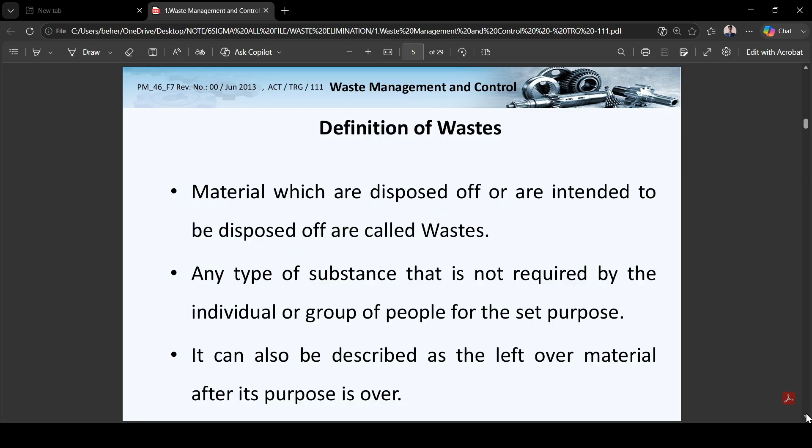Definition of waste: material which is disposed of, or is intended to be disposed of, is called waste. Any type of substance that is not required by an individual or group of people for a set purpose. It can also be described as the leftover material after its purpose is over.

Kinds of waste: solid waste, waste in solid form, example - burnt clothes, used hand gloves, packing material, food items, glass items, paper, scrap iron, dust, etc. Liquid waste, waste in liquid form - waste cutting oil, waste hydraulic oil, waste water, etc.

Classification of waste: biodegradable waste, that can get converted to soil over a period of time, regaining natural properties, can be degraded - paper, wood, fruits.

Non-biodegradable waste that cannot regain natural properties are termed non-biodegradable substances, or waste that takes a huge amount of time to degrade, or cannot be degraded - plastic bottles, cans, styrofoam containers, glass, etc.

Classification of hazardous waste: substances unsafe to use, which can create health problems for living beings and the environment, and require special attention to dispose - chemicals, medical waste, oily soaked cotton waste, paints.

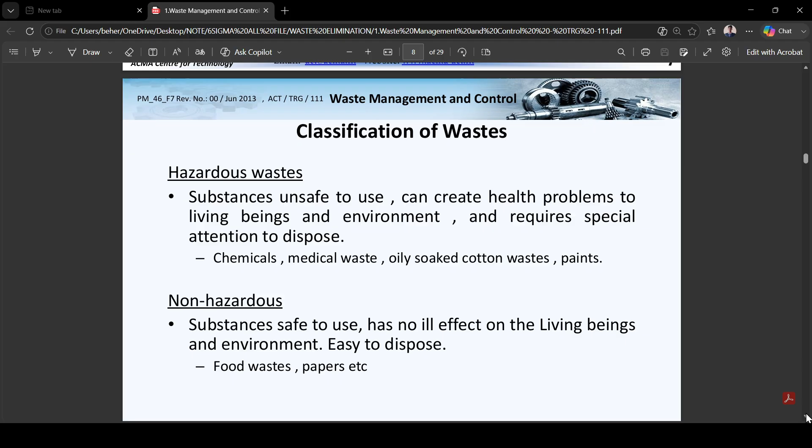Hazardous waste: substances unsafe to use, can create health problems to living beings and environment, and require special attention to dispose - chemicals or medical waste, oily soaked cotton waste, paints. Non-hazardous substances are safe to use, have no ill effect on living beings and the environment, easy to dispose - food waste or paper waste.

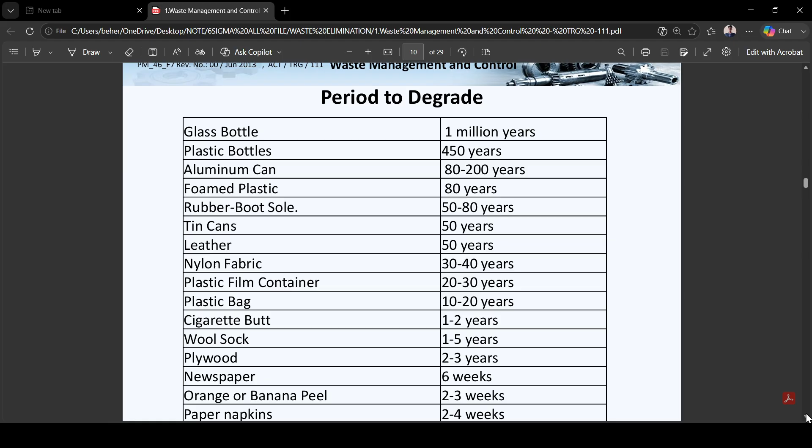Waste generation by country - every country generates waste. I think India will be the highest. So how many years does it take for waste to degrade into sand or soil? Glass waste - I think 1 million years. Plastic waste - 450 years. Aluminum can - 80 to 200 years. But some waste will take even more time.

Effects of waste: affects our health, affects our immunity, affects our environment, affects our climate. Waste is not good for us, not good for the environment. So what can be done? How can it be managed and controlled?

Waste management and control - reduce waste. First, reduce office paper waste by moving towards a paperless office. Improve product design to use less material. Redesign packaging to eliminate excess material. Eliminate use of wood. Work with customers to design and implement recyclable packaging. Reuse coolant, improve life. Use durable towels, tablecloths, napkins, dishes, cups, and glasses. Encourage employees to reuse office material rather than purchase new ones.

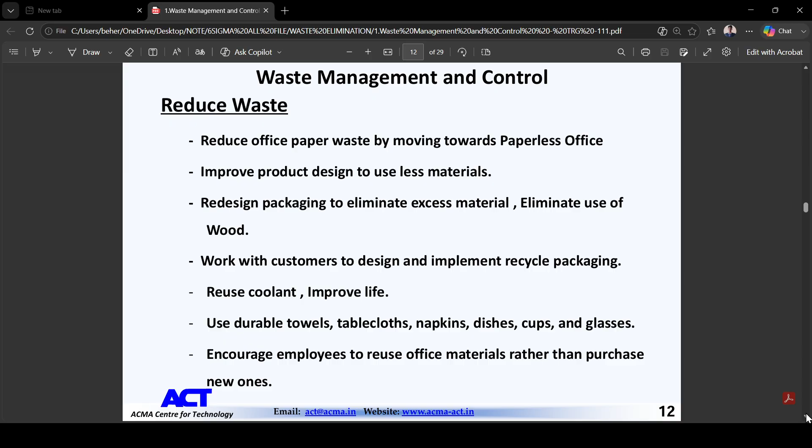Waste management and control - prevent waste: packaging waste reduction, material reduction, optimum use of water and coolant, avoid spillages or contamination, improve life.

Waste management and control - reuse. Go for longer life materials. No waste left dead.

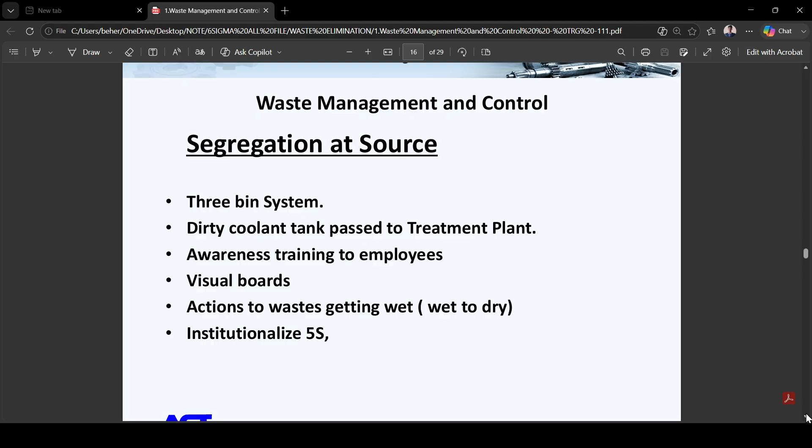Segregation at source, three-bin system. Dirty coolant tank passed to treatment plant. Awareness training to employees, visual boards, action to waste, getting wet to dry. Institutionalize the 5S.

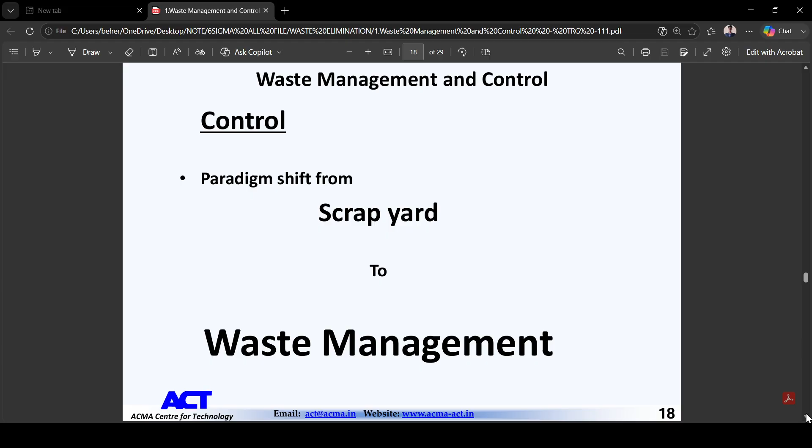Segregation at source, three-bin system, source and control. Paradigm shift from scrapyard to waste management.

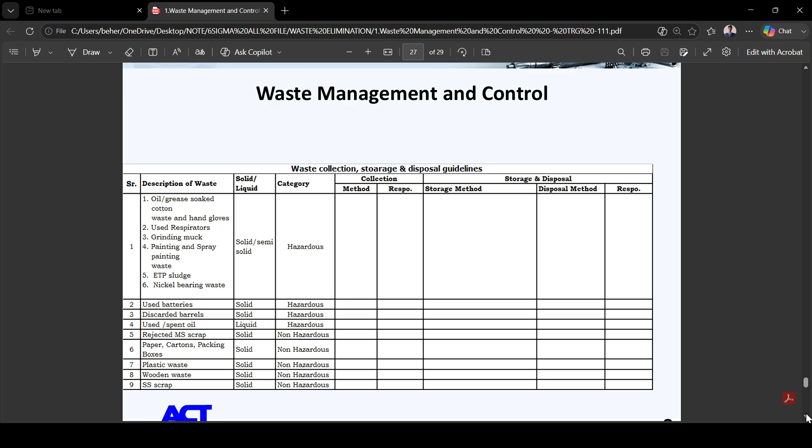Some words to remember: clean up and flourish, or pile up and perish. A company is only as clean as its dirtiest area. The best way to keep a shop clean is to not dirty it in the first place. Handle waste once only.